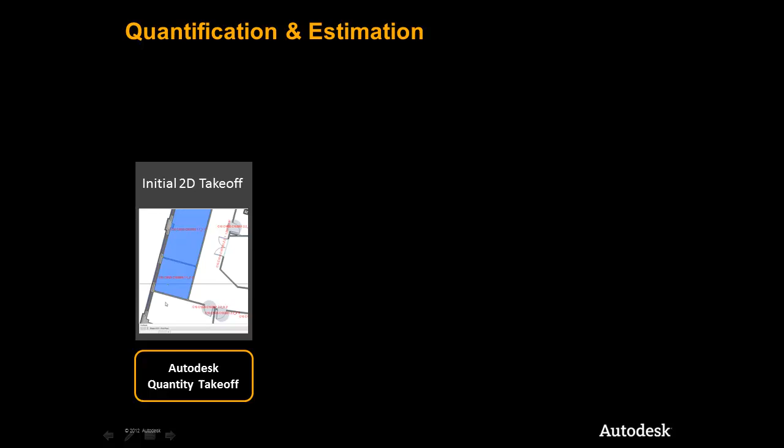Next, we move to leveraging a BIM and using the 3D models for quantification. We can generate quantities from a model in several ways, and this component will highlight the use of both Autodesk Revit and Quantity Takeoff. We will again see how an estimator can gain efficiencies in their quantification process by reducing the amount of time it takes to quantify the building components and produce more accurate results.

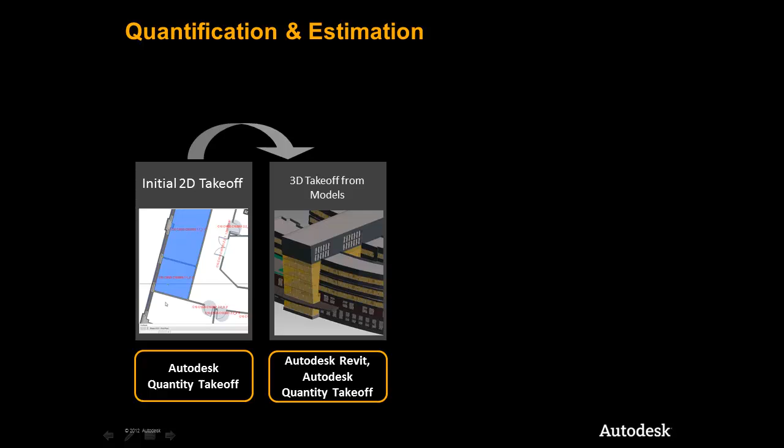We will then briefly highlight the Autodesk Construction Solutions' ability to connect with industry-leading estimation applications and pass valuable and accurate quantities generated into an existing estimation package. Finally, we'll see how powerful and flexible reports are generated to help communicate the work that has been done and share the quantifications and estimations with project stakeholders.

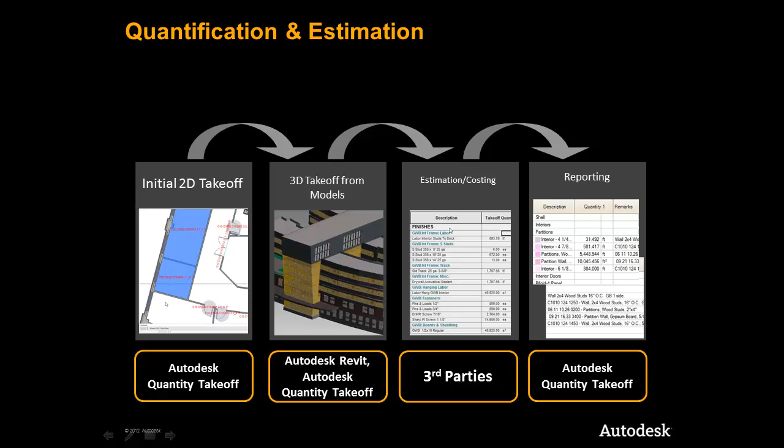It is important to note that the Autodesk Construction Solution ties directly into a data management and collaboration layer that empowers firms like yours to manage, share, and securely collaborate with all project stakeholders, both inside and outside your firewall. As we see in this graphic, the Autodesk Data Management and Collaboration Solution is a connector that links the workflow components together, enabling project information to be shared at any stage in the process.

Let us now take a closer look at these workflow components and see the tools that are an integral part of the Autodesk Construction Solution being used for quantification and estimating. Estimating is a core process to all projects, and construction firms have invested in developing workflows, methodologies, and catalogs to support this process. Accurate cost forecasting early in the project has a significant impact on executing the work.

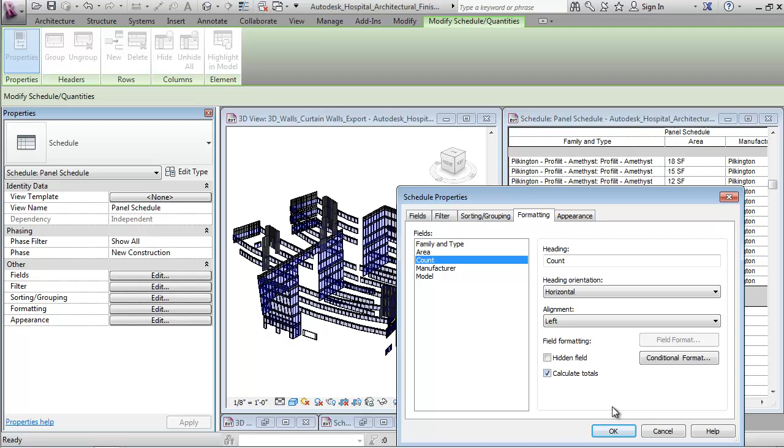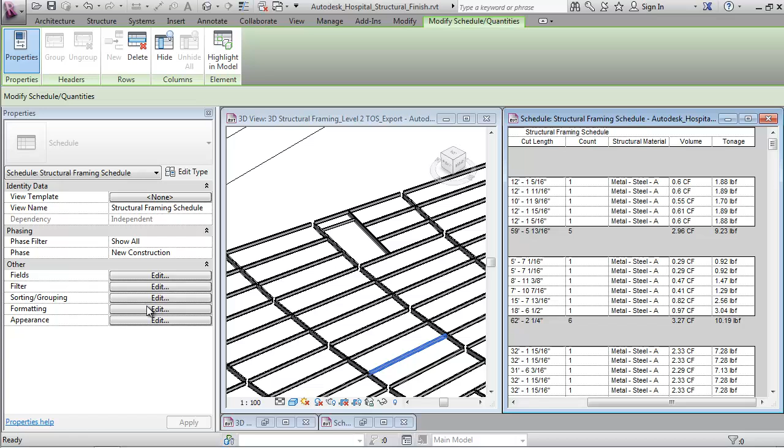Here we see how the Autodesk Construction Solution offers several ways to gain access to quantity information early in the process. By leveraging tools directly from within modeling applications, such as Autodesk Revit, we can quickly get a high level of understanding of the project costs. Schedules created by the designer can be leveraged by adding counts and totals, or a custom table can be generated on the fly to give you the feedback and quantities from the model information immediately. We can then take advantage of tools built specifically to count and categorize the project quantities to further plan and analyze the project costs.

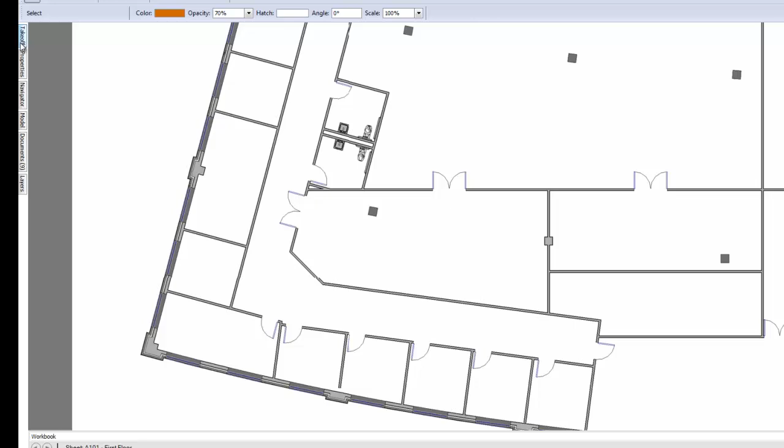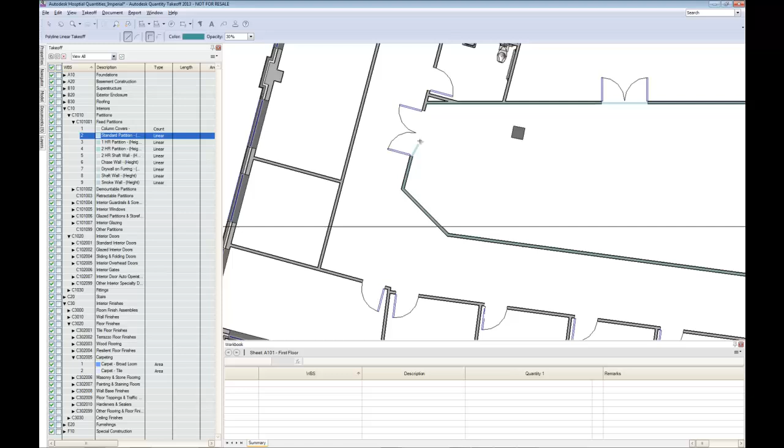Here we see a floor plan for the preliminary design brought into Autodesk Quantity Takeoff. We will leverage a catalog of standard building components to begin to quantify and classify the data provided using two-dimensional takeoff tools. Note we can do linear takeoffs for things like walls and partitions, and that once digitized, we get a worksheet of the quantities generated that keeps a running tally of the information.

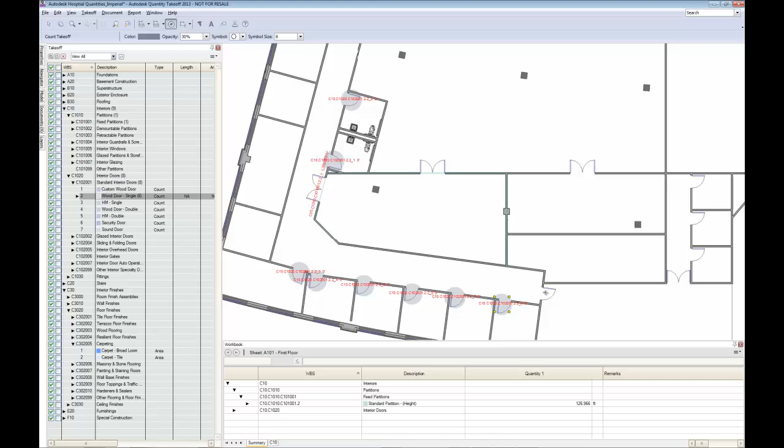We are also given a visual component to show what parts of the plan have been taken off or traced already. The process simply repeats for other components, like a count for the doors or an area takeoff for the carpet in these offices. By leveraging simple and effective takeoff tools, we can quickly generate quantities using a company standard or historical estimating information, and have an ongoing tally of what has been done within the project.

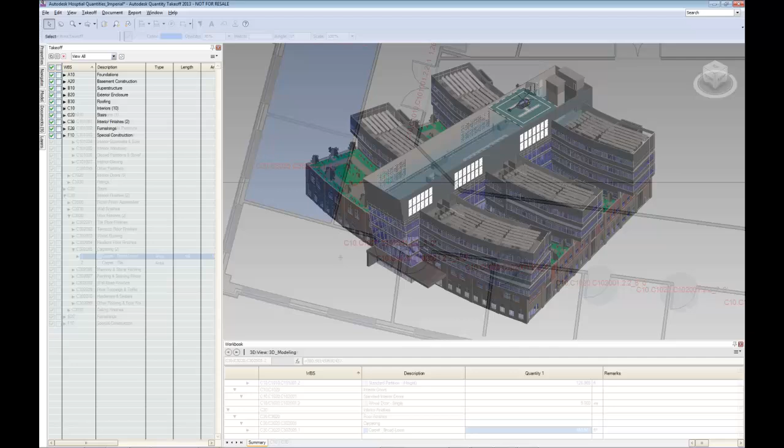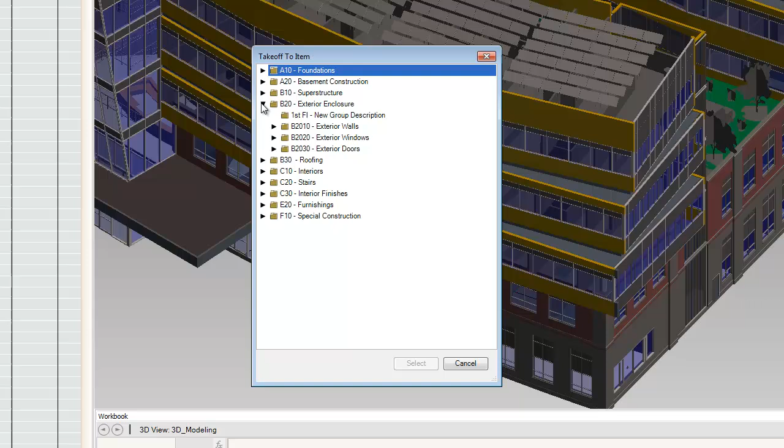Next, we'll move forward in time to when we have a completed design and a building information model to leverage. Here we can see the 3D model of our project again in Autodesk Quantity Takeoff. We will continue to leverage our estimating standards in the catalog and can simply select the model component we wish to quantify and do a takeoff to the appropriate item.

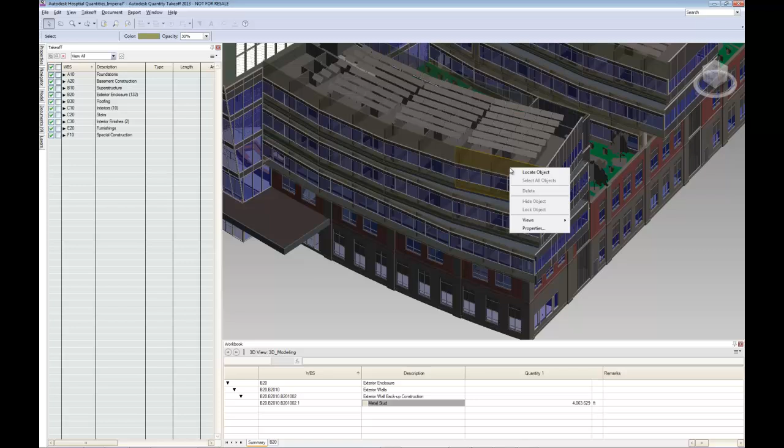The system analyzes the models and cross-checks all instances of these components, both in 3D and 2D, ensuring there is no duplication. Again, we see that the workbook is tracking all of our quantification data and allows us a real-time look into the data that is being created, ensuring accuracy and transparency to the process.

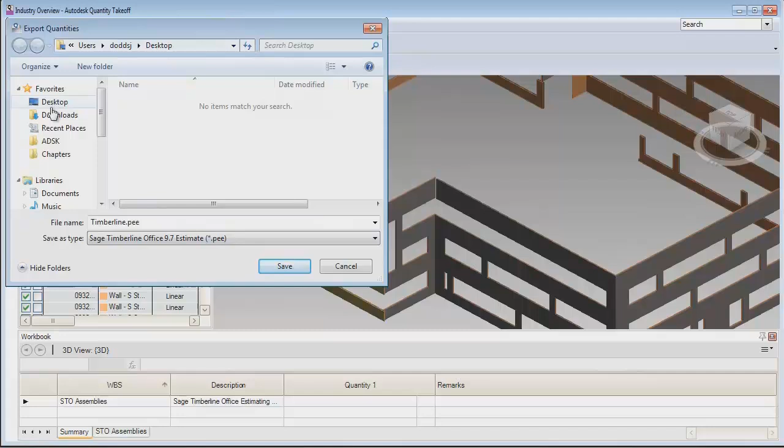With tools for linking to industry-standard categories, we accurately and quickly collect all the quantities for the project and classify them against a standard. We can then digitally take off the design components and categorize them against the catalog structure to pass into your existing workflow and add cost, labor, material, and other factors to continue the estimating process.

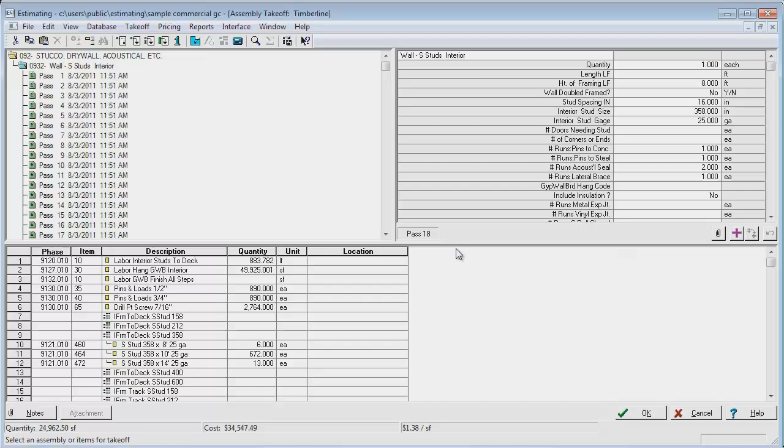Whether working with models or 2D sheets and images, accurate quantities can be extracted. You have the ability to cross-reference items, further validating the data and increasing your confidence in the project totals. Moving from paper-based quantification to a digital process brings with it increased efficiency, with quantities tied directly to the design. The Autodesk Construction Solutions enable you to use systems already in place, but bring a more intelligent and streamlined approach to the quantification and estimating process.